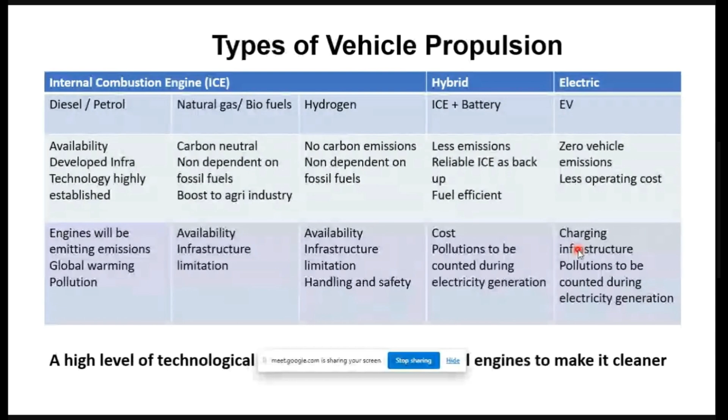So I will take you through the technologies, what is the basics of a diesel engine, how the pollutions are coming, what are the criticalities of pollutions, and what are the current technologies to make it cleaner. So let me check through the basics of combustion.

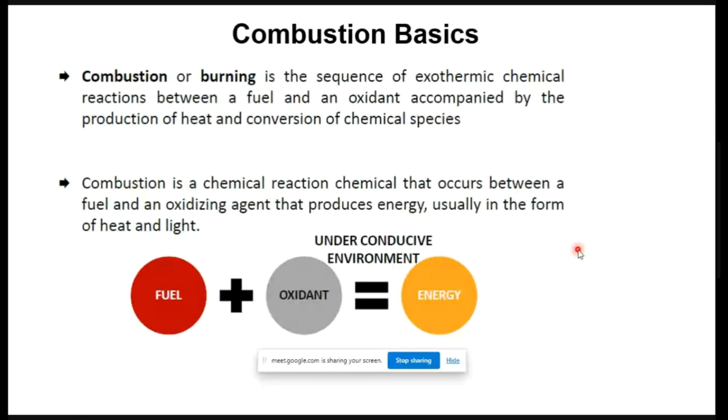Combustion is nothing but oxidation. If anything is burning, it is combustion. If I am lighting a lamp, that's combustion - I'm burning fuel, and my oxidant, mainly oxygen, is there from the atmosphere, and under a suitable environmental condition we get energy. This is the basics of all combustion, whether it's an engine or burning something in your kitchen - if you switch on the gas stove, it's the same thing. I am giving an ignition, the gas is coming as fuel, oxygen from the atmosphere, and it's getting burnt. It should have a proper environment for proper combustion. So this is the basis of combustion.

Assume that all this fuel, whether it's diesel or petrol, are all hydrocarbons - there is carbon and hydrogen with different molecular configurations. And oxygen - combustion means oxidation. If I am oxidizing any hydrocarbon, the result will be carbon dioxide, hydrogen, water (H2O), and energy. This is the ideal combustion.

So everything should be fine. There are no other emissions. Only water vapor, carbon dioxide, and energy will be there.

This is the ideal case. But in the real case, air is not pure oxygen. Air has oxygen, 78% nitrogen, hydrogen, water vapor, all these things. Once it gets burned, CO2 will form, H2O will form, energy also will form.

Apart from that, some unwanted things also get formed. We call these pollutants, because the nitrogen from the atmosphere also gets oxidized, so that becomes NOx. N means nitrogen, O means oxygen, X can be one or two - nitrogen dioxide, monoxide, everything is possible.

Second thing is, burning may not be completely proper because something can remain unburned. It results in unburned hydrocarbons, smoke, or carbon monoxide. Because if oxygen is there but all the carbon is unable to get proper oxygen, something will form as CO - it may not be completely oxidized to CO2. So this is also a pollutant.

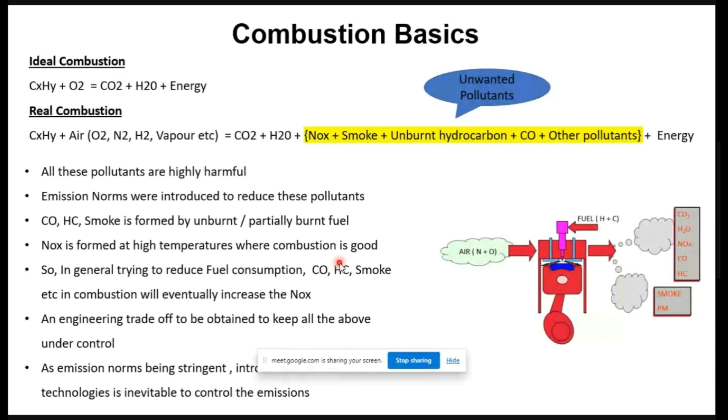So these are the ways emissions get formed in an engine, IC engines.

So right now, let me put what are the factors which can impact higher combustion. Diesel engine is a heterogeneous combustion - I am putting liquid fuel, liquid diesel, injecting it into air where it is compressed to certain temperatures so that the diesel will burn.

The factors inside the chamber will strongly influence the quality of combustion, mainly the in-cylinder temperatures. This depends upon compression ratio, rate of fueling, fuel injection timing, EGR - everything will define the temperature inside.

Then the air fuel mixing, how it is getting mixed. If I am having higher pressure, mixing will be proper, and all my fuel particles will get sufficient air to burn it off. The swirl, meaning the motion of air inside the combustion chamber, will make all the fuel particles get an equal amount of oxygen for burning. The shape of the combustion bowl is also important for proper air fuel mixing.

Next is at what time I will inject the fuel, at what rate - all these things impact the quality of combustion. So if you see, over the last 20-25 years a lot of work has happened in improving the bowl shape, improving injector pressure. Around 20 years back, maximum injection pressure was around 600-700 bar. Right now, common rail systems are going up to 2000 bar fuel pressure, so that atomization is very fine, emissions will be less, and efficiency also will be better.

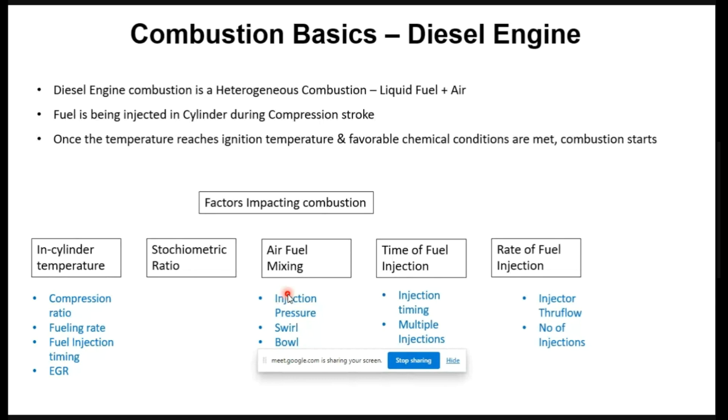So what are the major pollutants from diesel engines? As already explained, first is nitrogen oxide, NOx. Wherever nitrogen in the combustion chamber oxidizes with oxygen above 1400 degrees, it forms nitrogen oxides. These are toxic gases causing lung diseases.

Next is particulate matter. For a diesel engine, since it's heterogeneous combustion, incomplete combustion will create this particulate matter. Soot particles and heavy smoke particles contribute 50%. There are some soluble organic fractions, mainly from hydrocarbons, from the fuel and from the oil, that also contribute to particulate matter. Inhaling all these things causes asthma, lung cancer, and other cardio diseases.

Next is carbon monoxide, whose criticality I already mentioned. Then hydrocarbons - incomplete combustion results in hydrocarbons. You may know this, like with a kerosene lamp or in our kitchen, at that time we get a smell of unburned gases because it is not getting properly combusted. We see a white smoke coming from that, which is mainly hydrocarbons - also a toxic gas.

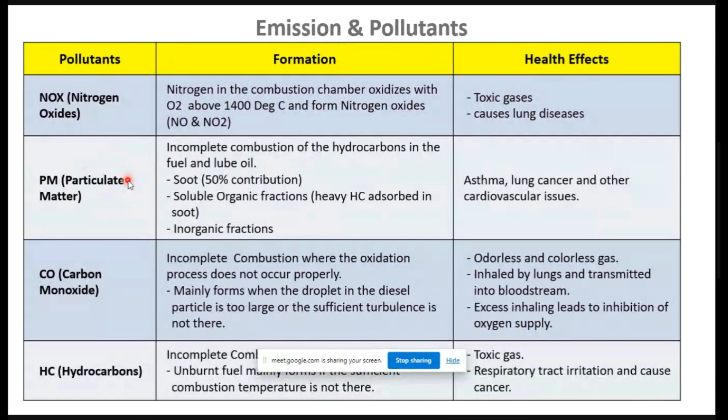So these are the four emission parameters; mainly two are the major critical emission parameters coming from diesel engines. Particulate matter constitutes carbon, some fuel-derived fraction, oil-derived fraction, and some sulfates - sulfur from the diesel also contributes to the particulate matter.

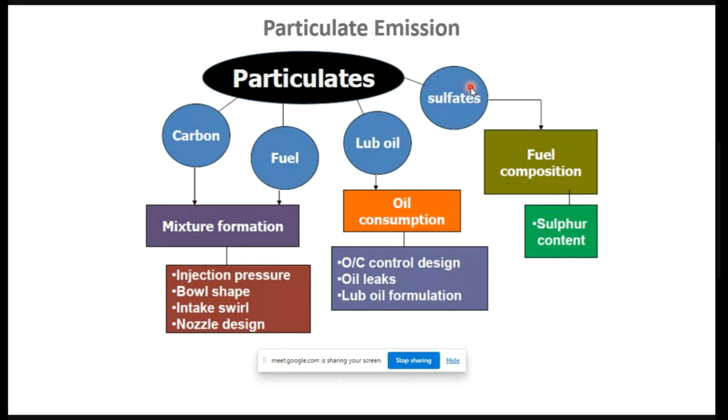So right now we've gone through the different types of propulsion technology, how the diesel engine works, and how emissions are formed with that diesel engine. The next thing is how these emissions can be controlled. So we will go into controlling the emissions - what are the different methods for controlling emissions?

Here I will go for two things: one is base engine hardware. There are two ways to control emissions - one is in-cylinder emission control, because in the combustion itself we control it, so that formation itself is reduced. Second, once it is formed - since there's a limit, I can't make it zero - how can I treat it externally once formed? That comes under after-treatment devices, which we put in place to reduce emissions from the engine.

So basically, if you consider the engine cylinder, these are the main areas: one is basic engine hardware, second is the fuel injection system, and the air system - because air and fuel interaction creates the emissions and power output. Base engine hardware includes things like piston bowl, friction reduction, low oil carryover - all these make the engine better with low power loss.

The fuel injection system - injection pump, injector, and common rail - these are new technologies reducing emissions from the system. Coming to the air system, right now turbocharged and intercooled engines are common. If you see, all petrol engines too, not only diesel, are going with turbocharging - TSI engine, TDI engine - because that helps in improving emissions and increasing power capacity. There are EGR valves, EGR coolers, everything there to reduce emissions with the help of the air system.

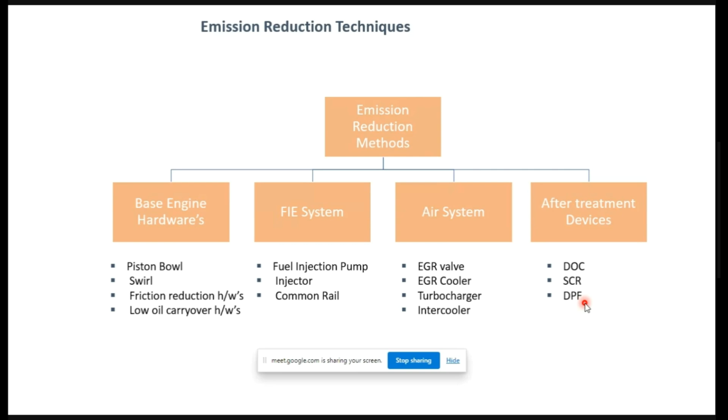If you have a BS6 vehicle, you may face the issue of DPF getting clogged, with a dashboard indication that your DPF is choked. You have to take the vehicle for a drive for 10 or 20 minutes to clean the filter. Sometimes the engine will show that AdBlue levels are low, so you have to fill the AdBlue. All these symbols come up, but don't worry about them, because in old vehicles none of this was there, and emissions were high. Right now, to keep emissions under control, all these systems are there, and by adding DEF or AdBlue, we make the engine run with lower NOx.

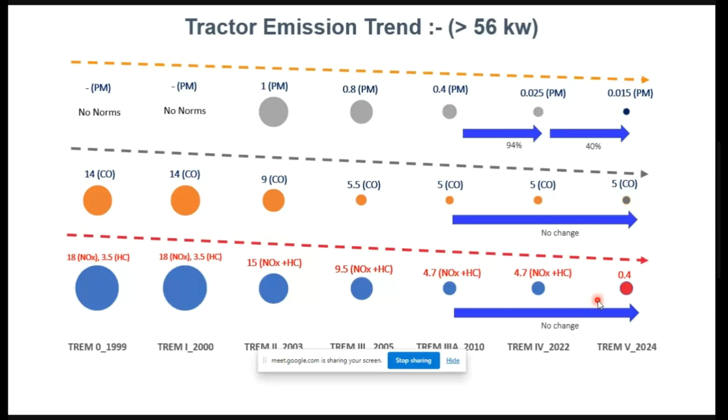Here I'm putting the global trend, just for reference, to emphasize the point. Right now Europe is at these norms, and we are also at par with them. With the current TREM 4, India is at par with Europe - our emission norms are more or less the same. If you see the US, it's more stringent, and in India it's even more stringent than the US. So our government and our people are putting more focus on reducing emissions.

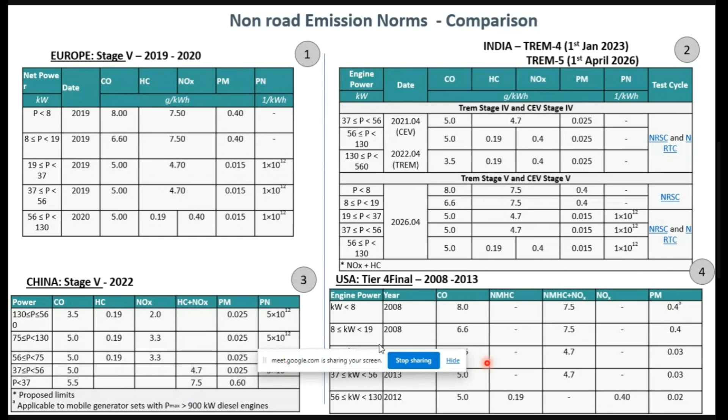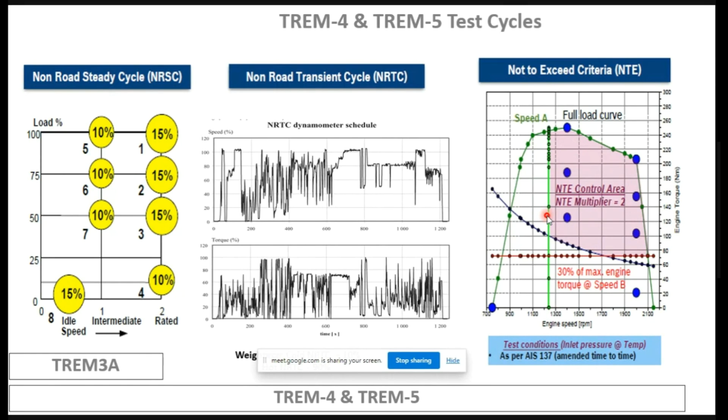One more thing - we can't test a vehicle in actual real-world emissions directly, only test an engine with a cycle that is more or less related to actual in-use cycles. The old cycle was a steady state cycle, where we select some points like rated speed, max torque at different points, and take an emission reading. But due to technology improvement and the need to be more realistic to actual operation, transient cycles were introduced, where every second the load and speed change and total emissions are measured. NRTC stands for non-road transient cycle, and NTE stands for not to exceed. All this means we can't exceed certain emission values even at different ambient conditions - maybe up to 820 millibar, or up to 5,500 feet altitude, I still have to meet the emission norms. This much stringent norms are put in place to control air quality.

So I've gone through the emission norms - how our emission norms have evolved and what technologies the government is pushing. Right now I'll focus on the 2-3 major technologies relevant for current engines, which help bring NOx down to 0.4 or PM to 0.015 and so on.

The major or foremost requirement is the high pressure fuel injection system - around 1600 to 2000 bar is required now. You may know that 10 or 12 years back, certain engines used CRD technology, common rail vehicles. It was unique at that time because the common rail vehicle had a lot of electronic control, and the vehicle itself was badged with the name common rail system.

That is an added advantage to them because we'll get better power and better drivability. But today, we can't imagine a diesel engine without common rail system—majority, around 90%, of diesel engines are coming with common rail system, because otherwise we can't meet emission norms. We want this much of pressure.

The common rail system is a completely electronic control system where I can go for multiple injections, and it can control the rate of injections and the start of injections. Multiple sensors and actuators are there to control the engine at each level—high ambient, high altitude, low temperature, everything it is there. So everywhere it is getting controlled and proper fueling and proper timing is done so that emissions will be minimum.

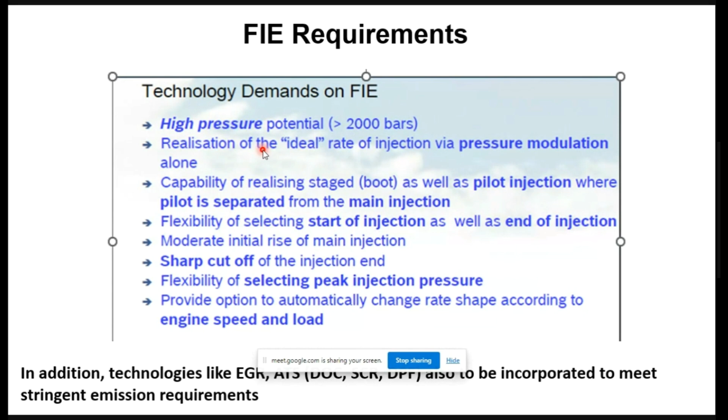And this ECU also controls the after-treatment systems, so that everything is under one platform. It's a typical common rail system—as the name indicates, there's a common rail, and the pump is only a pumping element.

When we learn through our initial IC engines, we know that when the pump rotates at half the engine speed, in a four-stroke engine, the pump will inject fuel. That concept is there, but this pump is not like that—here the pump will run at any speed. The only role of the pump is to give pressurized fuel to the rail.

The injection is controlled by an electronic control unit, which controls the injection timing, quantity, and number of injections, so precise control is there. All these are plus points—high pressure, variable pump speed, multiple injections. But the negative things are the high level of electronics and the cost. These are the two negative things of the common rail system.

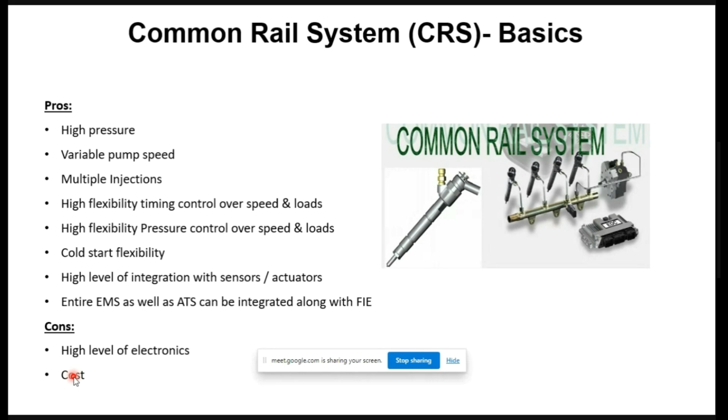Next is the EGR strategy, because this is to control in-cylinder emissions. As I already explained, NOx is formed by high temperature inside the combustion chamber. So if I reduce the temperature inside the combustion chamber, my NOx will get reduced, but my combustion efficiency will also be reduced. So what we can do is introduce exhaust gas back to the combustion chamber.

There are two benefits. The oxygen content inside the cylinder will come down. But more than that, all these exhaust gases consist of CO2. CO2 is a gas with higher thermal conductivity which will absorb heat—its thermal coefficient is so high that raising its temperature by one degree requires absorbing more energy. So inside temperature will come down and it will reduce NOx.

But obviously, if I reduce the temperature this way, my smoke will increase. At that time, this high pressure common rail system and multiple injection strategy will come into the picture to bring it back to a lesser PM. So this is a big trade-off happening between NOx and PM in-cylinder. It is managed by rail pressure, injection pressure, and EGR.

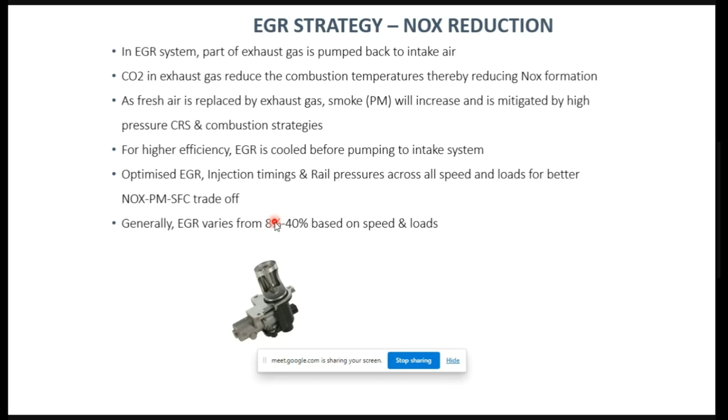So these are the main in-cylinder strategies—there are some more things like multiple injections, done with the help of this high pressure injection system. But there's a limit, because we can't improve it beyond a certain point. After that, whatever gas comes out will still have some emissions, so I have to treat it.

So one treatment we do for PM, CO, and HC reduction is DOC, diesel oxidation catalyst. If hydrocarbons or carbon monoxide are properly oxidized, they become carbon dioxide and water—so the same principle is used in DOC. DOC is an oxidizing agent; it won't do anything by itself, it's just a catalyst. The catalyst is platinum or palladium.

Once the gas passes through, the oxygen in the exhaust gas reacts with CO on the platinum or whatever catalyst is there and converts it to CO2 and H2O. So the CO and HC get treated. In PM, there's also a certain factor called soluble organic fraction, which is part of PM—mainly hydrocarbon-derived—that will also get burned off. So we get around 90% reduction in PM, CO, and HC.

PM can be reduced by around 20 to 30% with the help of a DOC. This depends upon the base value also. If the base value is huge, then 30% may not be possible, but if the base value is around some good value, then 30% we can reduce it.

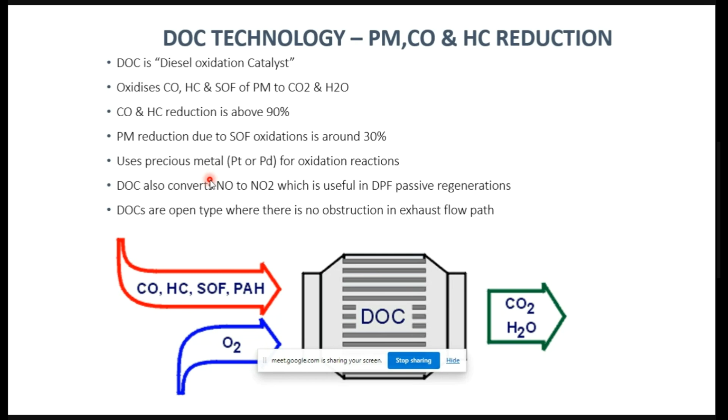NO and NO2 are not considered separate emissions, but NO to NO2 conversion is very much needed for the next after-treatment called DPF. Particulate matter I can reduce with the help of a DOC, but maximum 30% only I can reduce.

Smoke I have to trap. Assume I'm having a flow-through filter, so every smoke gets trapped, then zero smoke will come out from the engine tailpipe. The same thing is called a DPF. DPF is a wall-flow filter because everything is plugged. Gas comes here and moves through the walls by diffusion because it's a porous coated material like this, and all the smoke particles get accumulated here.

After a lot of accumulation, since soot is carbon particles, I need around 550 to 600 degrees Celsius to burn it off with oxygen. But nitrogen dioxide can burn this at 300 degrees also, starting around 250 to 300. So my DOC, with this NO to NO2 conversion, helps burn this accumulated soot at a very low temperature without any additive - with 200 to 300 degrees itself, the smoke accumulated here gets burned off by NO2.

But sometimes we may not get that temperature all the time, so it will get accumulated. Then what I will do is put fuel in the DOC - a DOC reactant which gets converted, fuel is hydrocarbon which gets oxidized in the DOC. Oxidation means burning, temperature will go high. That temperature will be used to burn it here - oxygen from the exhaust gas and that temperature will burn the carbon particles. That is called active regeneration - regenerating the filter to new, like removing all the impurities or smoke.

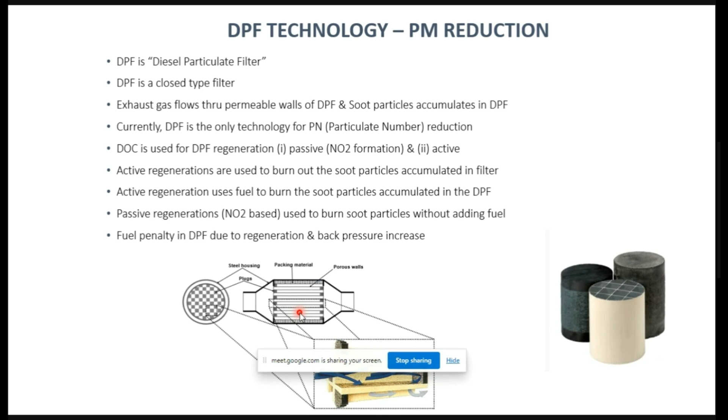These are the technologies we use for PM reduction. This is a DPF system. Generally gas will come from here, there is a temperature sensor, and a DOC will be there. From the DOC, NO2 will come, and these are the DPF. It will get accumulated here and finally it is getting burned off, and the exhaust is coming out.

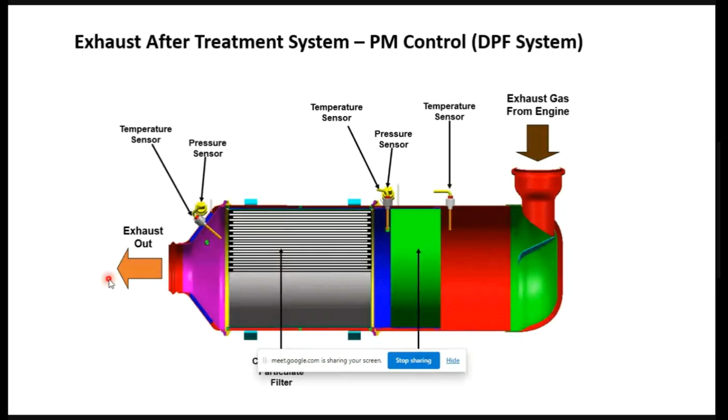Just to show an animated one. Assume that the engine is there, my gas is coming, and this is getting fully filled with carbon. Suddenly regeneration happens, here external regeneration is showing. Fuel is getting pumped here. Once the fuel is injected, that fuel will come to the DOC, the temperature will go high, and it will burn off the carbon and the filter will be clean. This is the basic functioning of after-treatment.

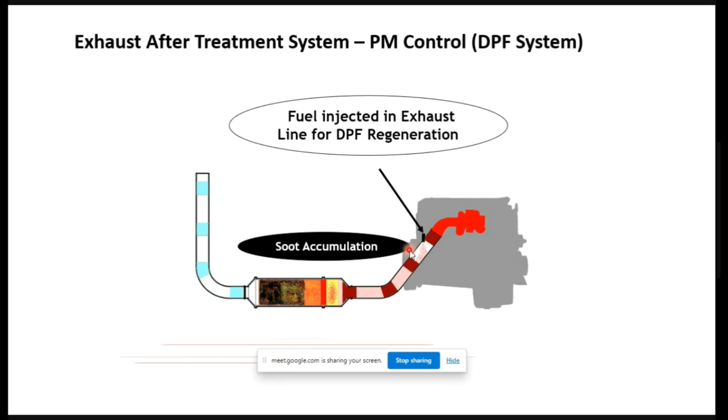Sometimes NO2 from the exhaust gas itself will burn it, and sometimes we have to actively put that in. These are the differences. The soot accumulates, and once accumulated, it goes for soot burning with active regeneration.

So I will go for the last one, NOx reduction. Whatever EGR and other things do for reduction of NOx, if I want NOx around 0.4 grams per kilowatt hour, I have to go for exhaust after-gas treatment.

This is exactly opposite to DOC. DOC is an oxidation catalyst - nitrogen gets oxidized to form NOx. So I have to use a reduction catalyst. SCR is selective catalytic reduction. I will reduce nitrogen oxide back to nitrogen and water by putting an SCR with an additional agent called AdBlue or DEF. This is also in the new diesel cars.

Every 10,000 hours or during service, you have to fill the DEF. It will show DEF level low, a DEF indication will be there. DEF means diesel exhaust fluid. Because of legal requirements, I had to meet the emissions, so I had to put this in. Then this will react with the NOx in the exhaust gas with a vanadium based or zeolite based catalyst, and it will convert to nitrogen and water.

Here also temperature, everything is required, and some injection system has to be there - lines, everything. It's a big complex logic, but these are all robust logic. The DOC also matters because NO2 ratio is important for SCR functioning due to temperature, since NO2 has a big impact on the speed of oxidation and speed of reduction. So a lot of sensors are there.

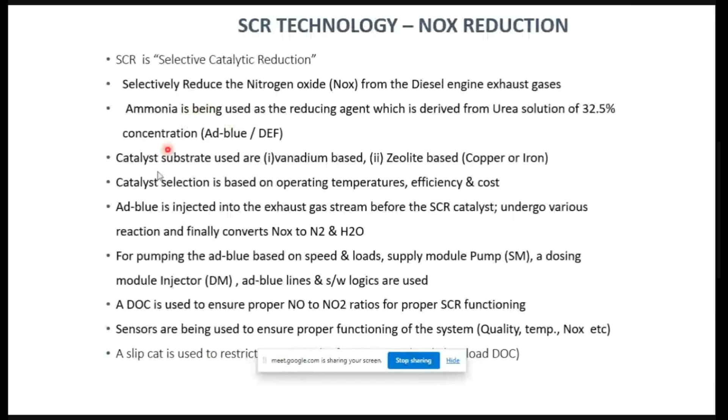The complete system is like a thermal factory. This will be the SCR - the AdBlue tank will be there, AdBlue controller will be there. From the tank it will come here and get put in. Here the SCR catalyst will be there, here the conversion will happen, and it will come out. There's a slip catalyst also there to convert the extra ammonia which gets slipped.

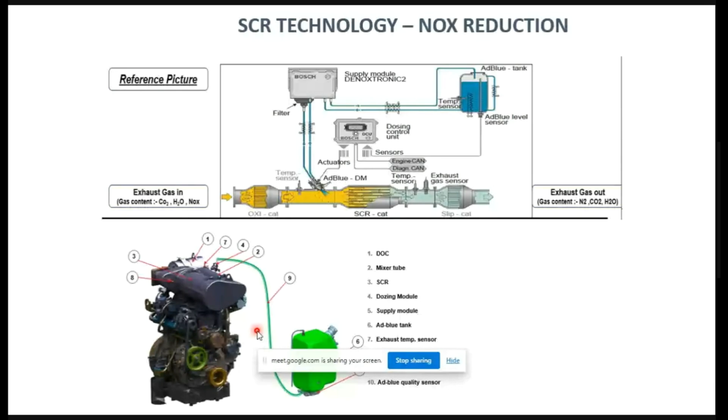These are the engine structure and all for that. These are all from my side for the emission control strategies to make diesel engines greener.

So any doubts, any questions you are having? If I know it right now, I will share the answer. If I'm not knowing it, I will come back and share the answer to the lead log so that you can get the answers. Feel free to ask - any questions from the participants?

Any questions, sir? Okay. Okay, sir. Thank you, sir.